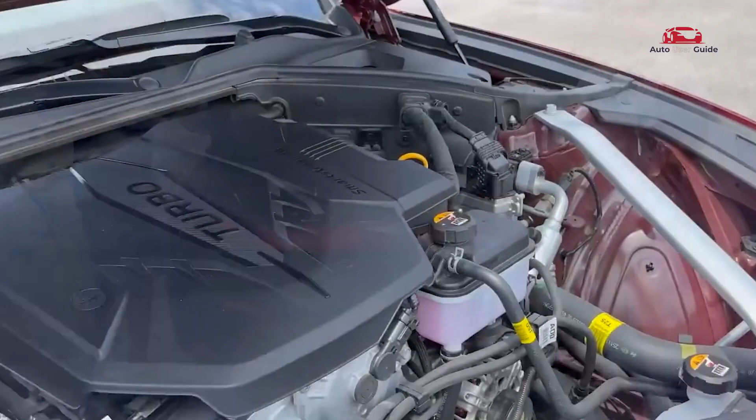Where is the fuse box located in the 2025 Genesis G80, and how can you easily identify the specific fuses for various components? In this guide, we will explore the 2025 Genesis G80 fuse box diagram and its location.

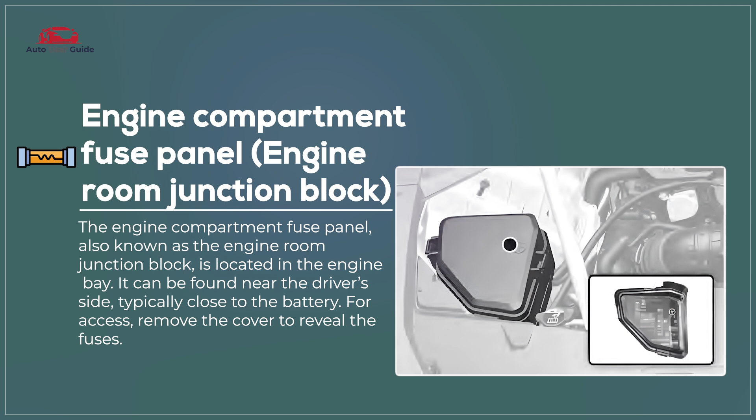Engine compartment fuse panel, engine room junction block. The 2025 Genesis G80 engine compartment fuse panel, engine room junction block, houses fuses for critical engine components. It provides easy access for fuse replacements, ensuring smooth operation of electrical systems like ignition and cooling.

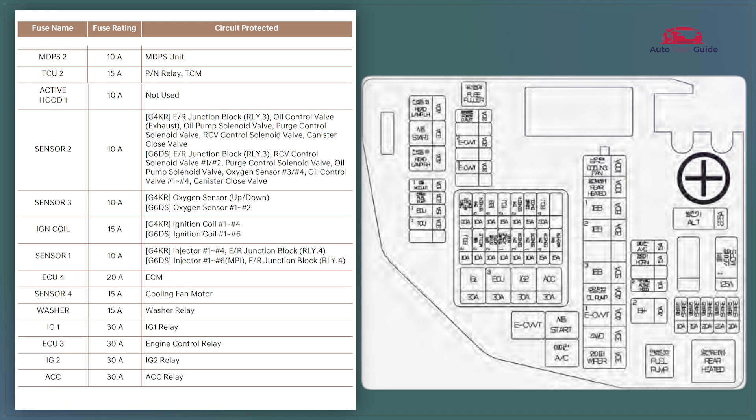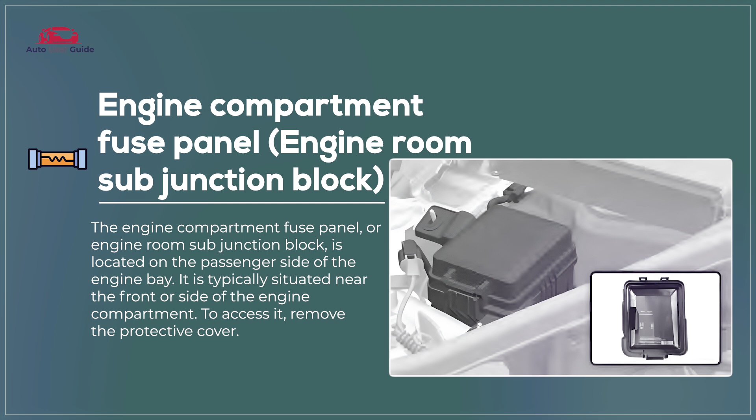Engine compartment fuse panel, engine room sub junction block. The 2025 Genesis G80 engine compartment fuse panel, engine room sub junction block, controls auxiliary engine functions, ensuring proper power distribution to various electrical components.

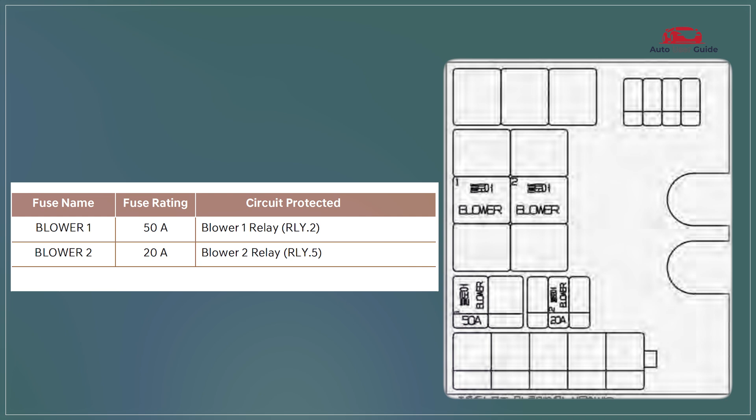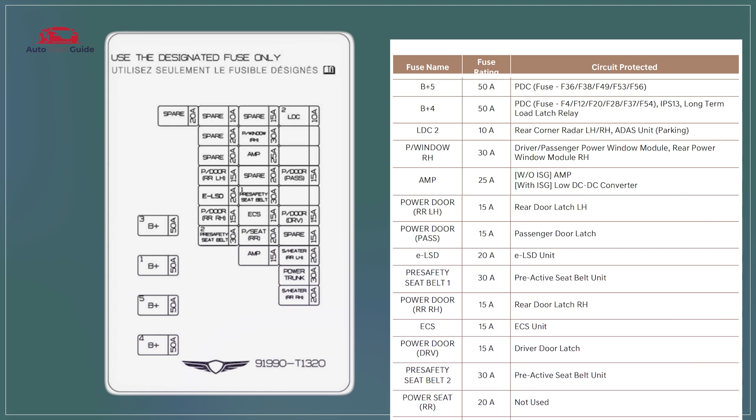Trunk fuse panel, rear sub junction block. The 2025 Genesis G80 trunk fuse panel, rear sub junction block, manages power for rear electrical systems, including the trunk, taillights, and other auxiliary components.

Trunk fuse panel, battery junction block. The 2025 Genesis G80 trunk fuse panel, battery junction block, distributes power from the battery to key electrical components in the trunk area for optimal functionality.

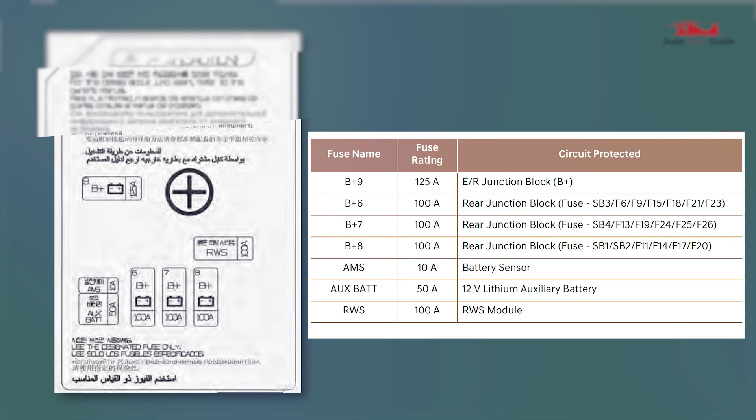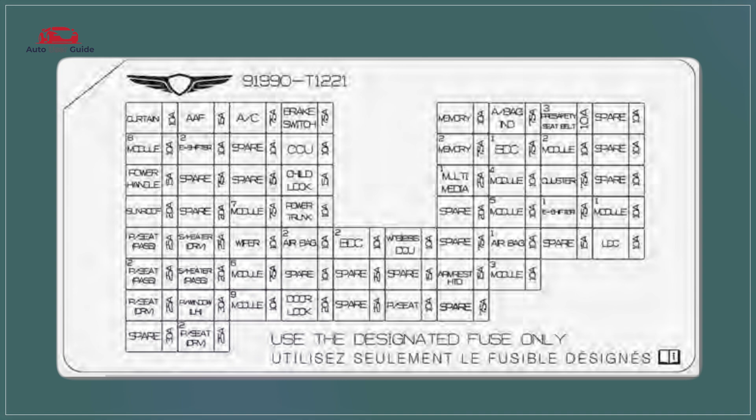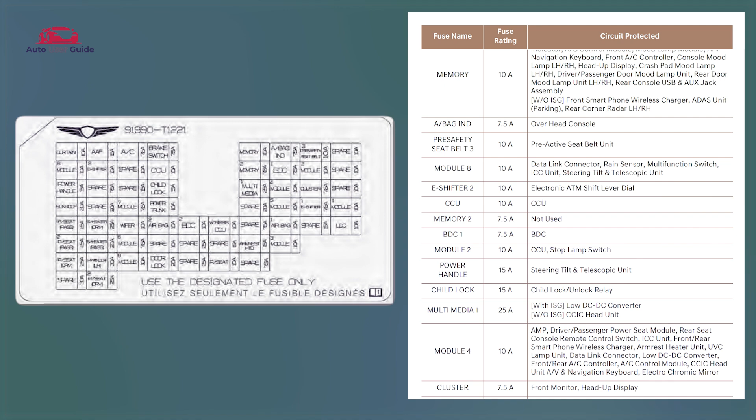Instrument panel fuse panel. The 2025 Genesis G80's instrument panel fuse box features a detailed label inside the cover, identifying each fuse's name and capacity. This panel protects various electrical components, including the sunroof motor, multimedia systems, instrument cluster, and head-up display.

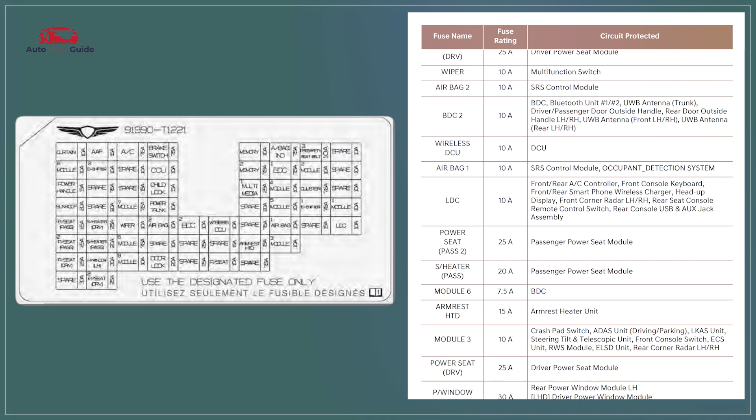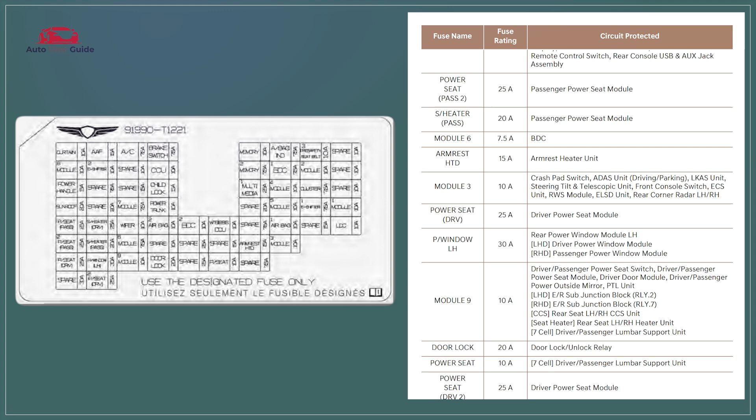Types of fuses: blade fuse, standard blade fuse, mini blade fuse, maxi blade fuse, micro 2 fuse, micro 3 fuse, J-case fuse.

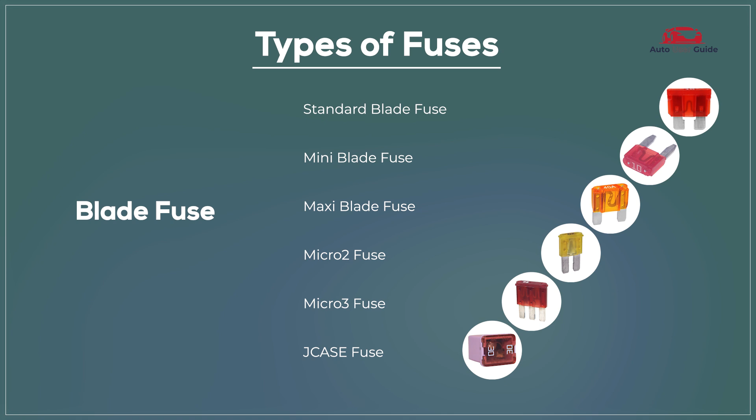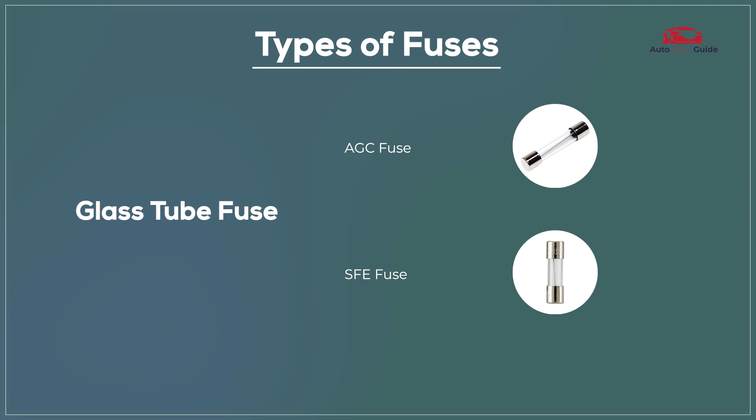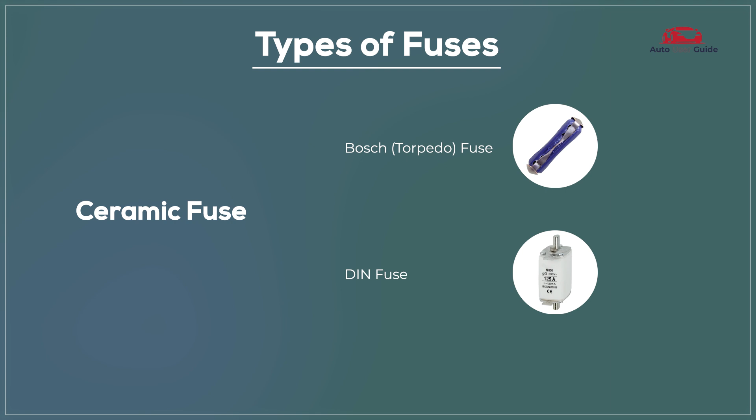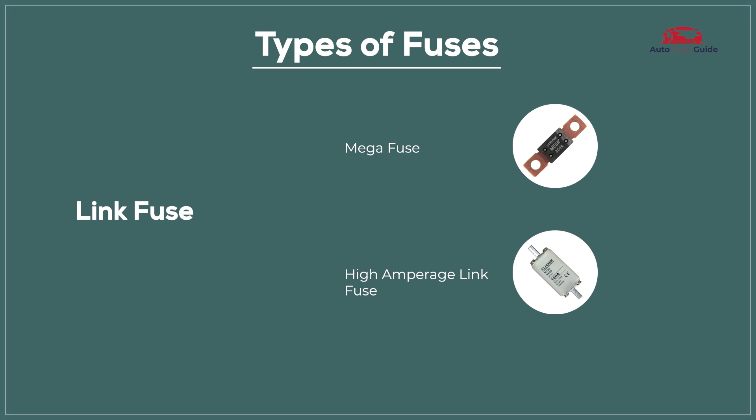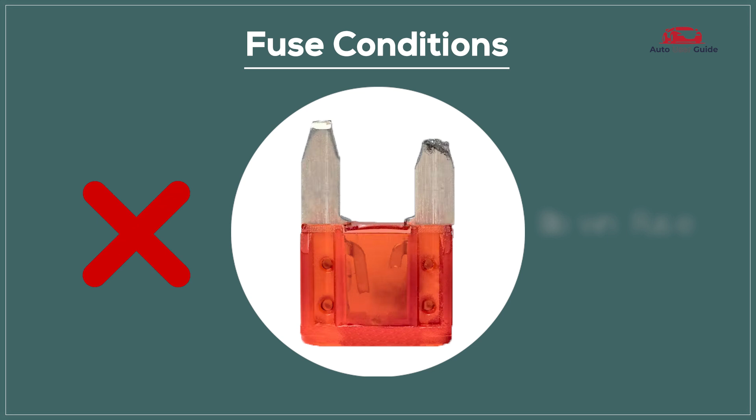Fuse conditions: blown fuse. A blown fuse means it's no longer functioning and needs replacement, while a perfect fuse is in good working condition and performing as expected.

How to change fuses: turn off the vehicle, locate the fuse box, identify the faulty fuse, remove the faulty fuse, inspect and obtain a replacement, install the new fuse, test the replacement.

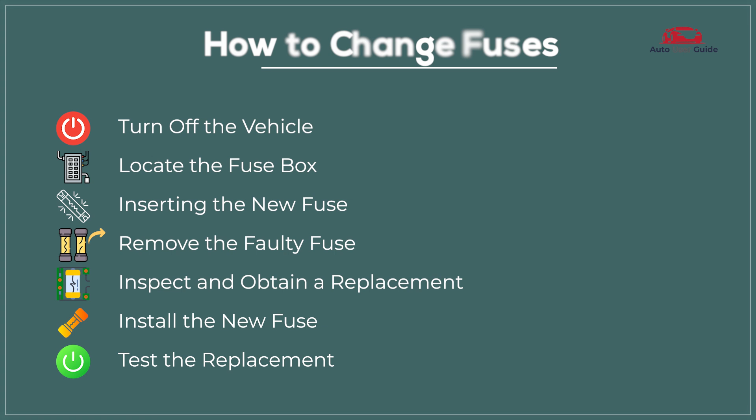Safety precautions: disconnect the battery, wear protective gear, use proper tools, check for correct amperage, avoid water exposure.